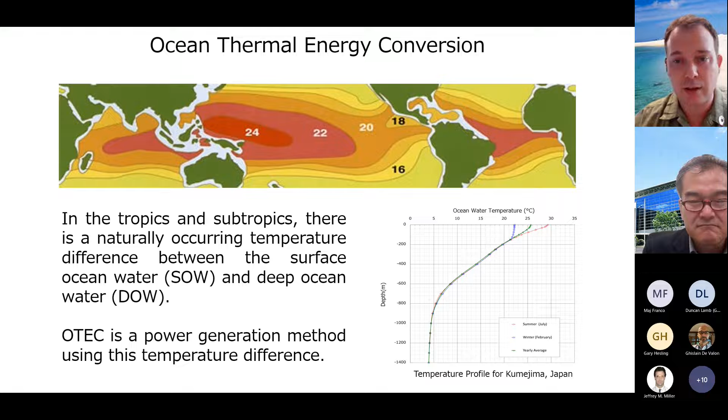The actual process for harnessing this is relatively simple. It's as simple as a steam engine, where instead of using water as our working fluid, we use a low boiling point working fluid. We put that working fluid into a heat exchanger where it is warmed by the surface seawater. The surface seawater is naturally heated by the sun, so the ocean acts as a battery where it heats that working fluid and creates a vapor. The vapor goes through a turbine, turns the turbine, which turns a generator and creates electricity.

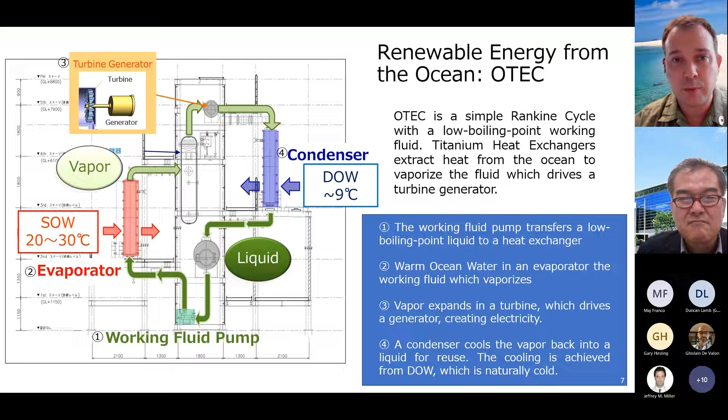And then we also get more efficiency, more help from the deep cold water as well, because that cold water turns that vapor back into a liquid and provides more motive force so that liquid can be reused again in a closed continuous cycle. And that's a really key benefit of OTEC: a closed continuous cycle means we can produce power 24/7, but renewably as well.

So here on Kumejima in Okinawa Prefecture, the Okinawa Prefecture government in 2013 established a demonstration facility to use existing deep sea water intake pipelines to demonstrate this technology long term. And so this is a 100 kilowatt facility, which is equivalent to about 250 households of power generation.

In Japan, our roadmap for development starts with this current demonstration facility, but our future goal is for an offshore large-scale facility with low-cost power generation at the 100 megawatt scale. To get there, we see two kind of branching markets and two branching opportunities. They both start at the next step of development, which is a 1 megawatt scale, which Kumejima Town here on Okinawa, on this island, is currently working towards.

This opportunity allows for not just power generation, but uses the water resources in a variety of ways that are interesting for island development and for island security. And so this is the next step that we're currently working on right now on Kumejima.

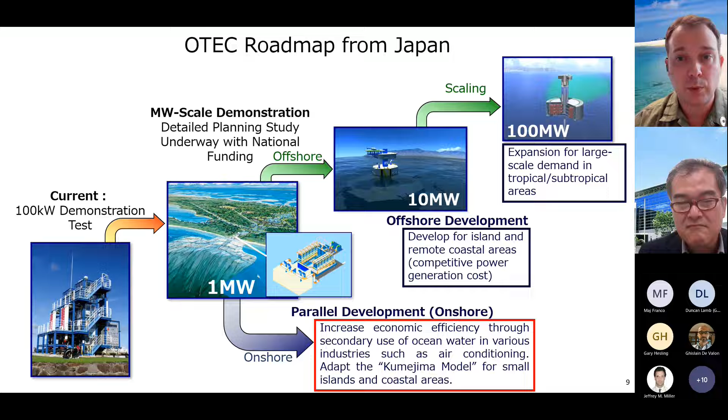Potential for this technology is worldwide. We need a temperature difference of generally what's considered about 20 degrees Celsius. So this is a vast area of the world where traditionally underserved communities can have the largest access to potential for this. So of course, Okinawa and where we are here in Kumejima is right at the edge of that usable belt, but there's a vast area where places like Indonesia, the Philippines, Oceania have really good access to this resource.

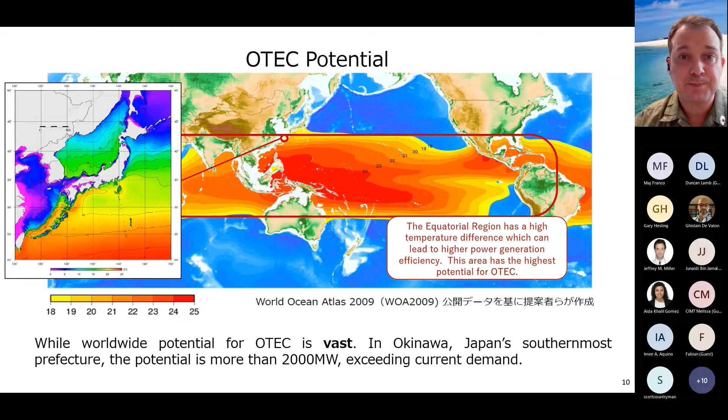And so this onshore OTEC combined with different industries creates a local resource that can help us address these global challenges we're seeing ever more strongly and needs increasing ever more dramatically from a single system. So the OTEC resource allows us to address energy security, water security, food and economic security, environmental security challenges, while also saving energy through things like seawater air conditioning. And so it's access to a resource rather than depleting the resources we have currently available.

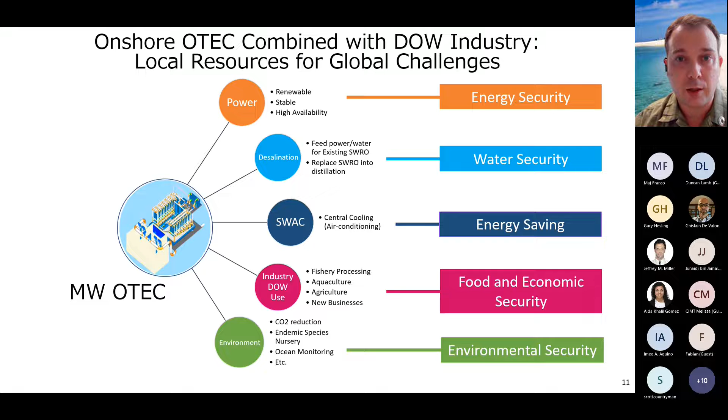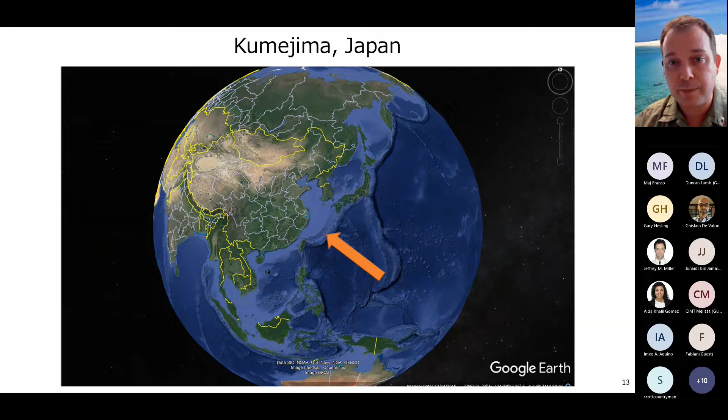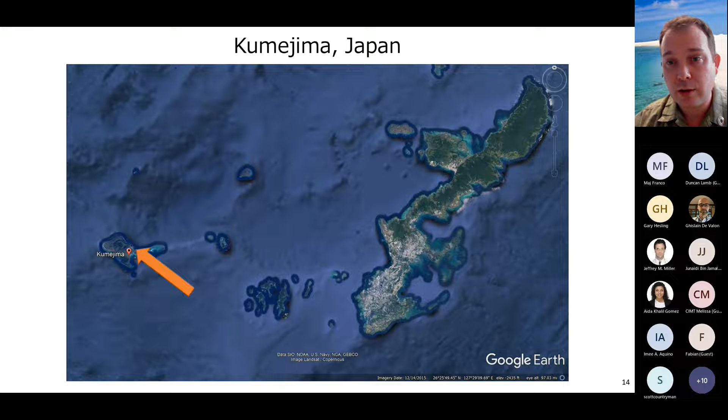So I'll talk a little bit more about what we're doing right now and how that will apply to this image of island security that we are looking at. So Kumejima is located in the Okinawa Prefecture, which is the southern part of Japan. Okinawa Prefecture is a community of many islands. And like many of the island nations that are looking at this technology, we're 100 kilometers west of the Okinawa mainland, out on our own on this small island grid.

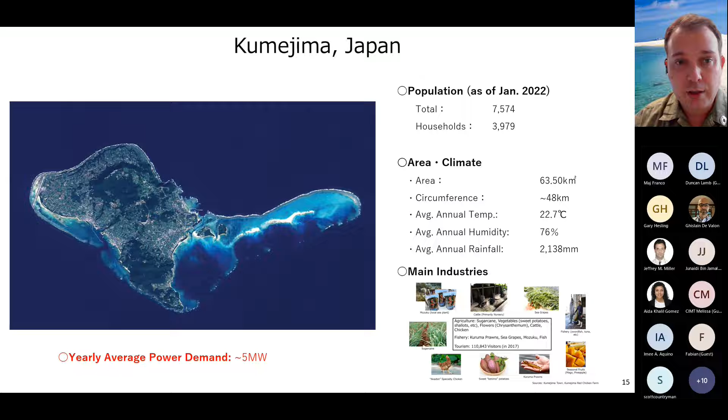So we have a population of about 8,000 people and an average power generation demand of about 5 megawatts. Our main industries are fishery and some agriculture, but we don't have a lot of tourism because there's other places that are more active. So the largest industry actually for Kumejima has become deep ocean water industries. Because we have access to this great deep water resource, we're able to produce our own products and actually export them as well throughout Japan. We've become the leader in several fishery products, as well as having growing demand for more production on this island as well.

So to talk a little bit more about what this resource is, what is deep sea water? Surface seawater is warmed by the sun. It's the natural seawater you see all around you, and it's a large part of the world's ocean and the world's surface. So it's a vast resource. But the rest of that water, the water you can't see, the deep sea water, is the larger resource. More than 90% of the ocean is deep sea water. We consider anything more than 200 meters to be deep sea water. So that's cold, it's nutrient rich, it's clean. It's a great resource for a variety of industries that I'll talk about in a little bit.

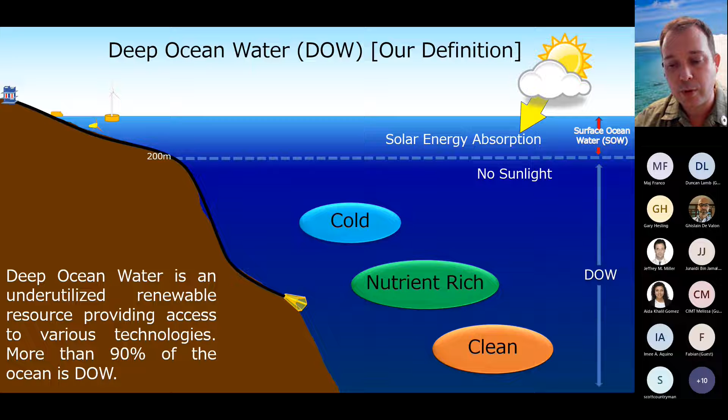It's probably hard to see because it's small, but when you talk about ocean energy, you talk about offshore floating wind and tidal and waves, and you can notice that the resources that they work from, while vast, are just a small part of the total resource we have out there. So really, deep sea water provides a great opportunity for a lot of people, and it's been underutilized so far.

In Japan, though, we have 15 sites that are currently using deep sea water throughout Japan, from all the way up in Hokkaido, where it's very cold, down to here in Kumejima. The uses of the water depend on the various properties of deep sea water that the industries are looking for.

Some of it's industry, some of it's academia, and some of it's just research. But they go from everything from food to bathing to aquaculture to even mineral extraction and refrigeration. So there's many different ways we can use this deep sea water depending on the needs

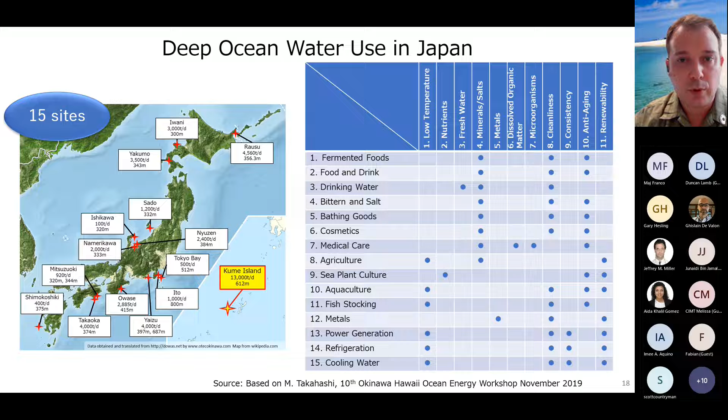of the local community. On Kumejima, while we're isolated and far away, production has grown organically from the efforts of local people. So we currently have about $24 million a year in annual revenue from various industries that have grown up here, mostly from fishery, and also a growing area from cosmetics. Even through the pandemic, we've heard that the cosmetics and other industries have continued to grow. So we're now closer to about $30 million a year in revenue, which is equivalent to about 300 jobs, which is really huge for a small island community like this.

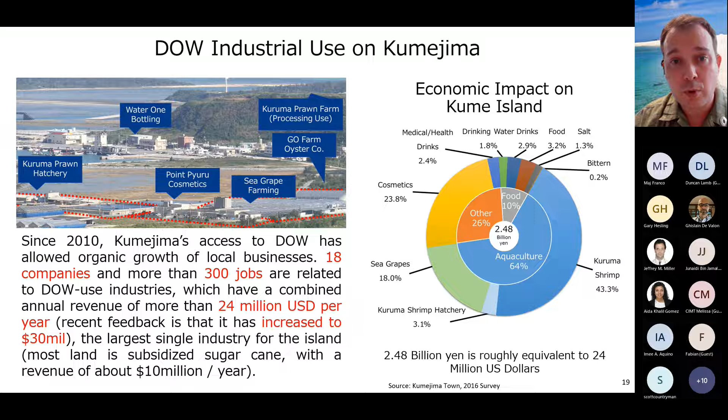So it's become actually the largest single industry for our island. Most of our land use is still for sugarcane. That only has a revenue of about $10 million a year. So we're far past the revenue from agriculture, just from a small scale footprint. So it's great for these island communities.

As far as aquaculture goes, Kumejima has long had the highest market share in Japan for kuruma prawns, which are a type of shrimp, and sea grapes, which is a type of sea plant. And both of these are produced with deep sea water or deep sea water properties.

Well, lately we have other industries that are coming online as well, with companies trying to increase the sustainability of their products, such as safe to eat raw oysters or different kinds of sea plants or even salmon. And so the deep sea water provides different benefits, such as bacteria-free water or temperature control that allow them to produce sustainably and safely, but also profitably, even on a small scale.

Cosmetics can be produced from deep sea water. The clean resource allows for sustainable water production. The minerals also can be included with other local ingredients and create a great product that can be used both locally and then also for export. So currently our local production company does OEM, providing production capacity for other companies throughout Japan and also abroad as well.

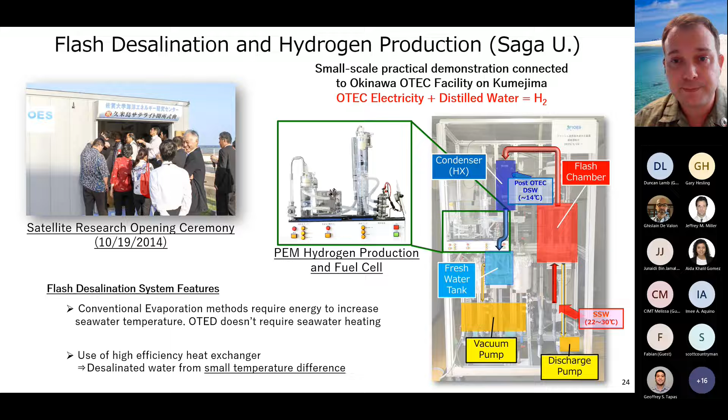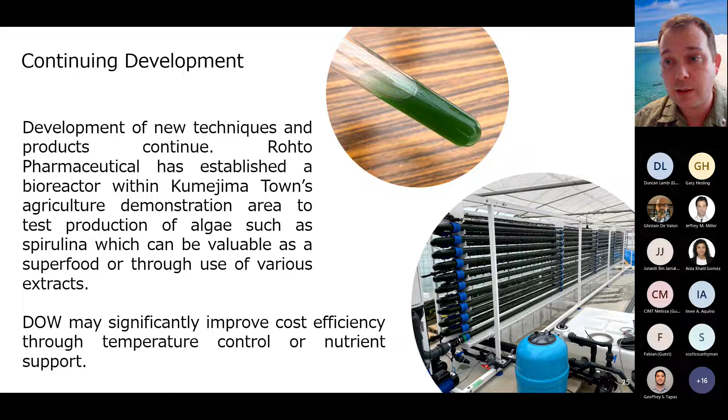Development continues with new companies coming in to use this deep sea water resource in new ways. One of them is Rohto Pharmaceuticals, which is a famous healthcare provider in Japan. But they're also looking at ways of helping social health and sustainability. So they are using the deep sea water resource to grow different kinds of phytoplankton, both for primary production, but all the way through tertiary production through additional industries such as craft beer production, also sales through their local cafe, so that they can model the different benefits of using both deep sea water with energy in a variety of

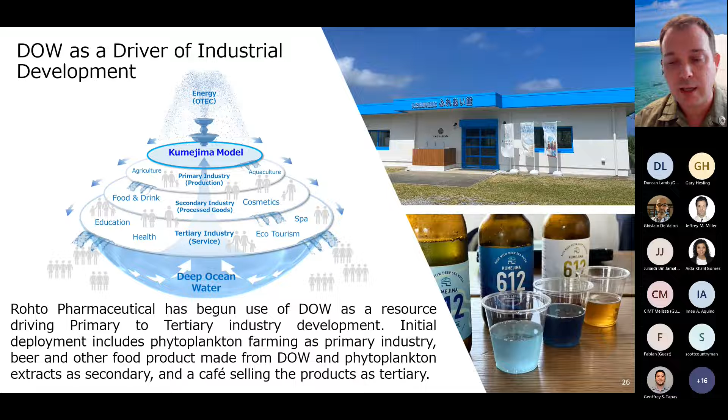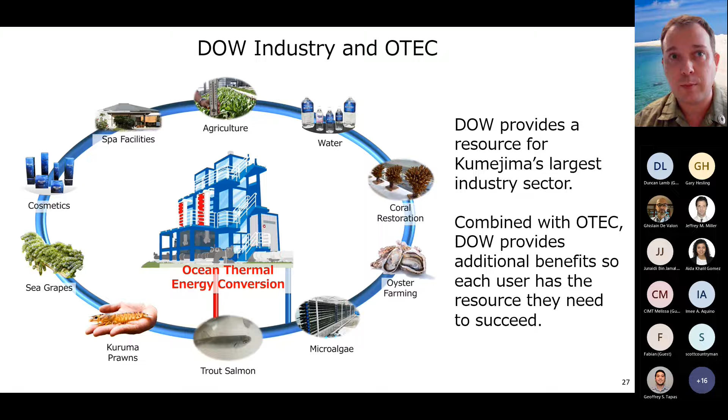ways for island communities. And so for our view on Kumejima, we don't think of OTEC just as a single power production or single industry, but we combine OTEC with all these different potentials to create a kind of systematic approach to future energy.

Around the world, OTEC and deep sea water has been catching on. So within the deep sea water use, there's many different ways that we can use it, from seawater air conditioning to provide high efficiency, low environmental impact cooling, OTEC for power production, and low temperature thermal desalination for freshwater production. Throughout the world, there's now 38 sites with more than 45 pipes using this resource in a growing way. And this started in a big way in the 1980s in Hawaii.

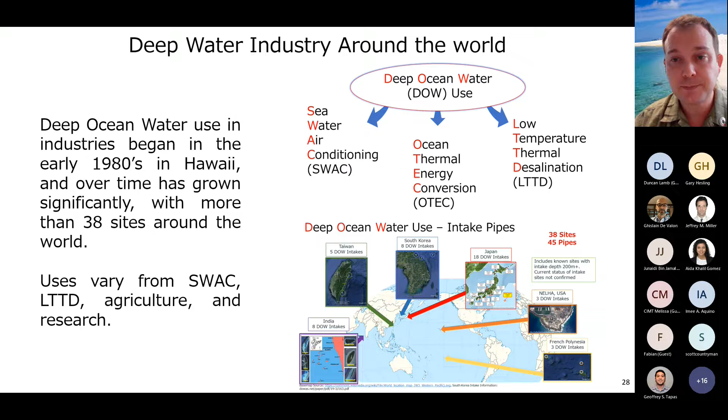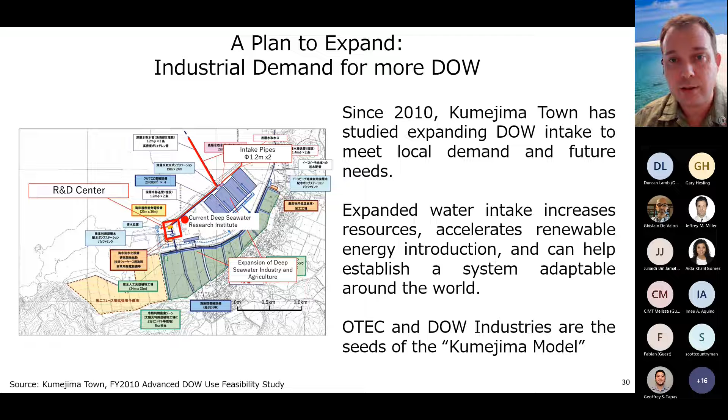So now I'll talk about how we're integrating these different industries and OTEC for the near-term future for Kumejima. Because on Kumejima we have all these great uses of deep sea water, there's been more demand to increase the intake capacity and increase the amount of water so we can expand these industries. At the same time, these provide the seed of what we call the Kumejima model, which is combining OTEC and various industries in a more efficient and smart way.

So instead of using water just once in various industries, we want to cascade the water. We want to use the water multiple times so that we're not wasting this great resource. We can use it in power production, but once the water leaves the power plant, unlike other fossil fuels, it doesn't become a pollutant, it doesn't become a waste, it becomes a resource for us. As deep sea water goes to the facility, it's slightly warmed, and that warm water can be reused in things like agriculture or even in fisheries multiple times.

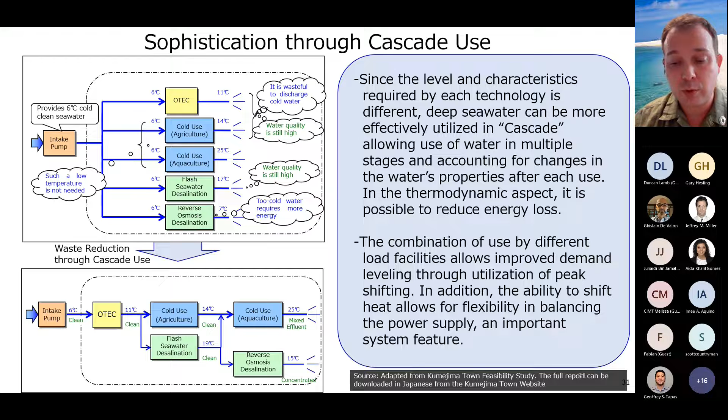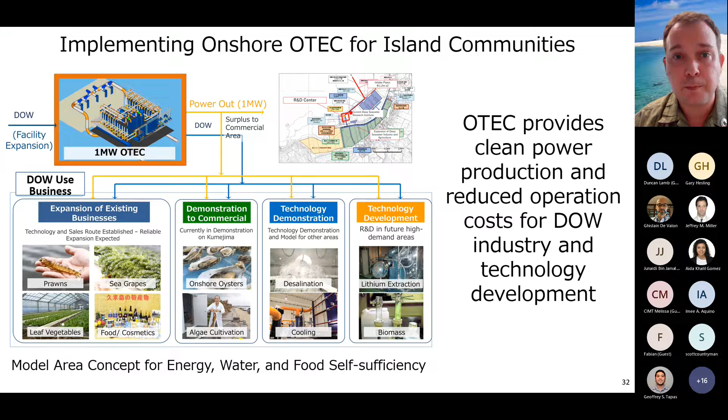So for implementing this here in Kumejima, and hopefully around the world, we expect to have at least a 1 megawatt OTEC facility powering this local community that also enables expansion of current businesses, technology demonstration, and the opportunities for new ideas to come in and expand. And that's where I think MARES is also really starting to think about how we use the ocean in new ways. This also feeds into Kumejima Town, the local government's look at the future, where in 2008 the mayor announced that they would work towards 100% clean energy.

To do that, they did an energy vision, looking at how the town could take advantage of the different technologies out there to get to 100% renewable energy. And how long will that take? For the town of Kumejima, we have an average of about 5 megawatt load. Our future looks to offset the current diesel power generation at a small scale with 1 megawatt OTEC as the next step. That will allow us to reduce the amount of diesel power used locally and also increase the amount of renewable energy we have on the grid without negatively affecting the grid.

In the future, with an offshore facility, a total of about 6 megawatts of OTEC generation, we're able to go 100% renewable energy with OTEC, solar, storage and demand response technologies to manage the grid. So this is the view for Kumejima. To implement this, we look at how we put in this deep sea water and generation facility. For us, we see deep sea water as a separate business and intake that allows us to provide a resource for a variety of industries.

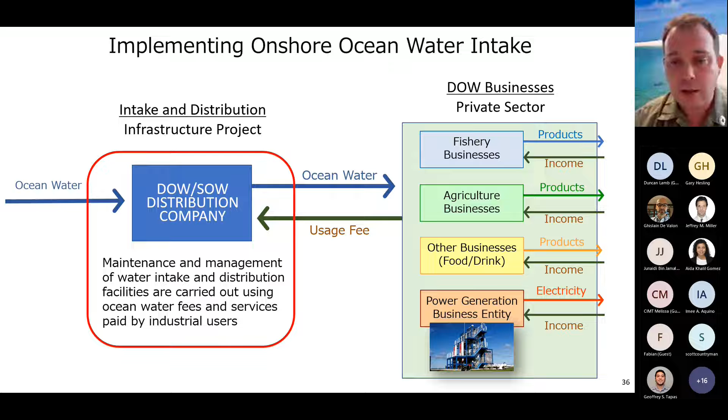These different industries can act as private sector businesses where they buy water from the distribution company and then provide revenues back. It creates a system where there is infrastructure available for the various uses, but also allows OTEC power generation to become a much simpler process. It's just a power generation company, just like any other IPP. So it becomes a very simple equation in terms of energy.

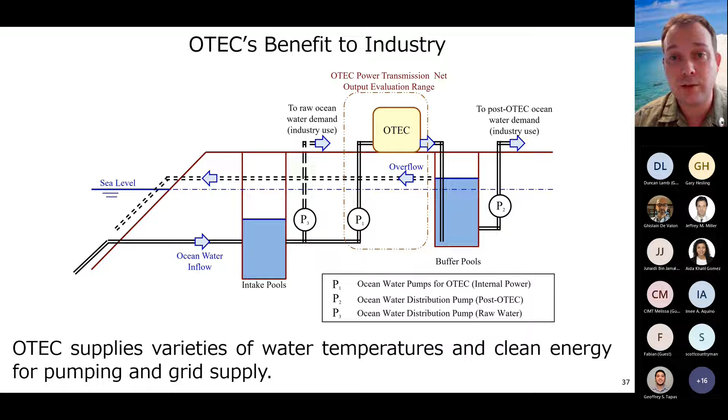But it also provides benefits. One of the benefits of OTEC is that as it supplies different temperatures, it can make it easier for the different deep sea water and surface sea water industries to get the water and the water quality they need to produce their products, and also reduce the pumping costs and other issues they would have if they tried to just put a pipe in the water on their own.

So how much does this cost? We look at two different scales, two different markets for OTEC: onshore and offshore. Onshore is considered anything up to about 5 to 10 megawatts. For 10 megawatts or larger, because of the large scale of the pipes required, we expect that it needs to be offshore. Offshore is more difficult, but at larger scales the economies of scale help bring down the cost significantly. In the future, we expect a 100 megawatt power generation facility to have a power generation cost of about 10 to 11 cents per kilowatt hour. So then how do we address the short-term small-scale costs?

So if we consider OTEC alone with the deep sea water altogether, of course it's very expensive. It would cost from about 40 to 60 yen or cents per kilowatt hour, which is expensive. However, if we approach this as we are doing in Kumejima, where deep sea water is an infrastructure project, a separate project, then we can reduce the capital cost in considering OTEC by reusing that water in multiple ways through different industries. And that brings the cost down really dramatically.

If we're just talking about OTEC, then we're at the 10 to 15 cents per kilowatt hour level, which is competitive with the diesel we have on the island already. So that's a really attractive approach and something new that hasn't been looked at in the past when we're talking about OTEC.

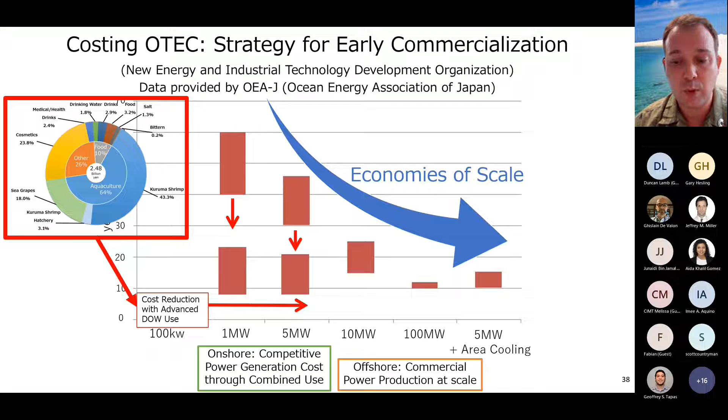So just to give you a general breakdown based on research done in Japan several years ago, the New Energy and Industrial Technology Development Organization of Japan, NEDO, did a study based on OTEC. Adjusting to current US dollars at 125 yen, we had a capital cost of about $24 million for an OTEC facility. If we include some of the capital cost for a pipe in that, we get a power generation cost of about 24 cents per kilowatt hour.

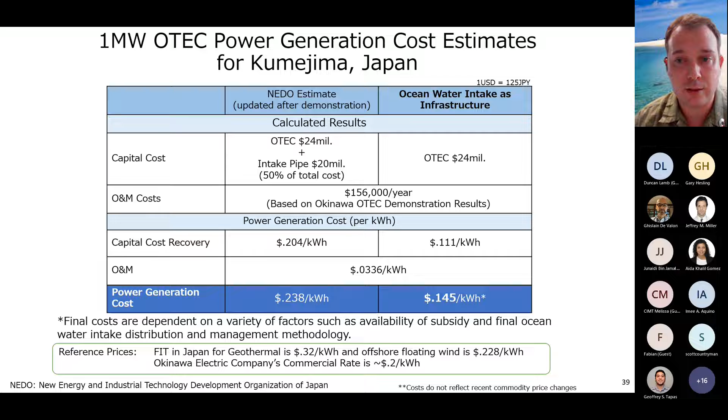If we separate those, if we make OTEC just on its own a power generation project, we come down to about 15 cents per kilowatt hour, which again is attractive. And with the current subsidies that are available, either with feed-in tariff or the different kinds of rates that are available, it can be attractive even at this very small demonstration initial stage scale.

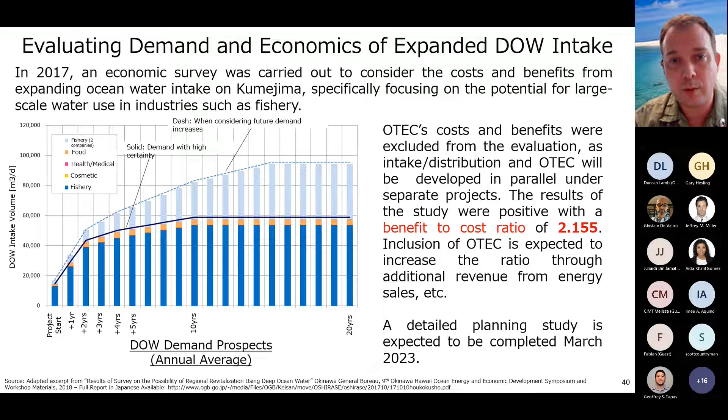And so for Kumejima, what are the benefits and costs for this? In 2017, we did an economic survey looking at how much water can actually be used on the island, including with OTEC. It found that from a project perspective, it had a benefit to cost ratio of 2.155. That's a really great figure for us. It shows that there's a lot of benefit for the public from this kind of infrastructure project.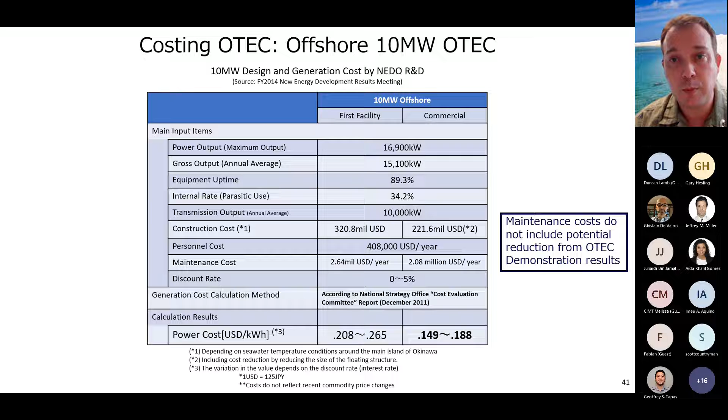And then in the future, as we go offshore, looking at the larger scale, this estimate doesn't include any improvement in maintenance costs that we found from our demonstration here on Okinawa, but we still have competitive power generation costs, where potentially for this offshore 10 megawatt for the larger communities that need more power, 15 cents to 18 cents may be viable for even the early stage OTEC demonstration facilities.

So now I'd like to talk about OTEC technology readiness and some of the challenges and opportunities that we have right now. A lot of the questions we get is, is OTEC viable? So what about the deep ocean water intake? Onshore OTEC does require a large intake pipe, and it also requires very long intake pipes. That's where the major cost issues come from for onshore applications.

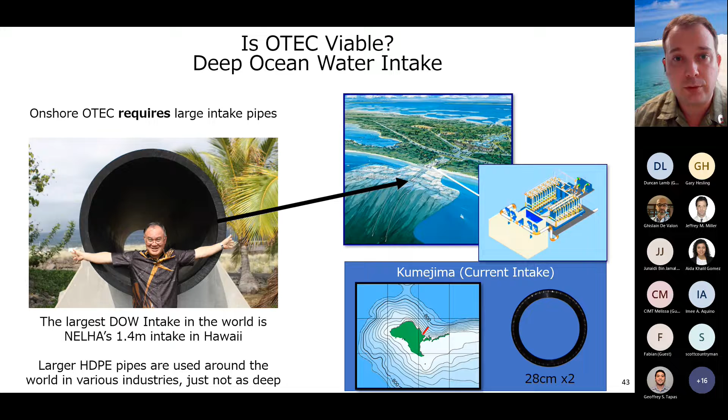At NELHA in Hawaii, they have a 1.4 meter intake already established. So it's an established technology. It's there. Kumejima, however, for our current small scale intake for this 100 kilowatt demonstration, we only have 28 centimeter pipes. So how do we then expand? Is it viable to do that? Well, there are pipes throughout the world now. Just 20, 30 years ago, there were only a few locations that used these.

Now, pipes, even in the deep sea water, are situated throughout the world, used for cooling hospitals in Tahiti, used for different kinds of cooling for resorts or fishery intakes and all kinds of applications. So it's an established technology. They're long-term, low maintenance, and it's a great resource.

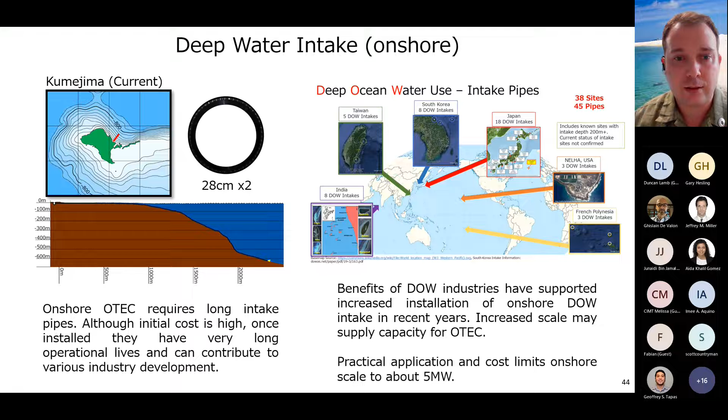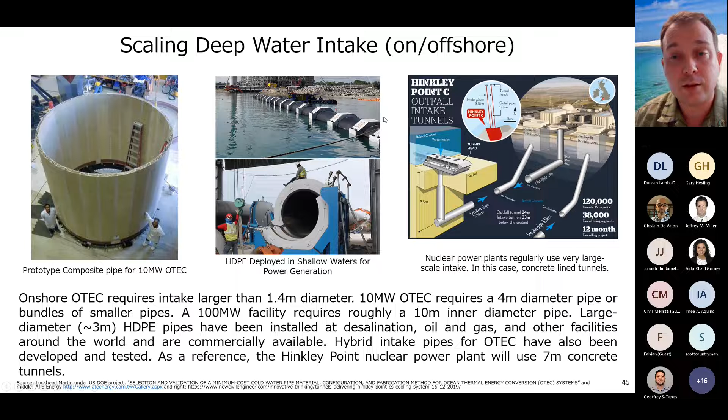When we go offshore for large-scale pipes, HDPE, the high-density polyethylene pipes, are now used for power production facilities around the world, and there's large-scale production and experienced companies that install them. There's also been work done looking at larger-scale facilities when they go offshore. And even for nuclear power now, they use very large intakes. Hinkley Point, which is under construction, just recently installed very large-scale concrete pipes. So there's a lot of other industries using these technologies that feed into OTEC and help offset a lot of the concerns that there used to be for OTEC.

How about the power generation system? Is OTEC viable? Well, since 2003 at Saga University, which Professor Ikegami is the director of, they've had a small-scale lab using the technology and testing various cycles, various working fluids and different components. Then this research was put into actual use here on Kumejima in 2013. From that, we've had long-term autonomous automatic operation in a real-world environment, and we have that data that helps us look at the future.

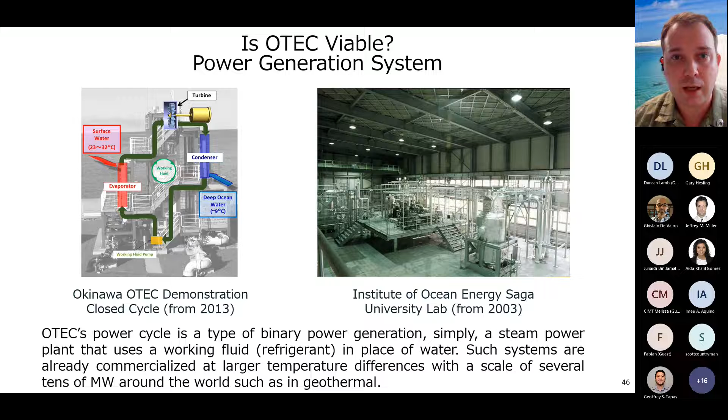In the 1970s and 80s, there was initial work done in OTEC, both in Japan and Hawaii. And the evaluation was that OTEC is technically feasible, but not economical.

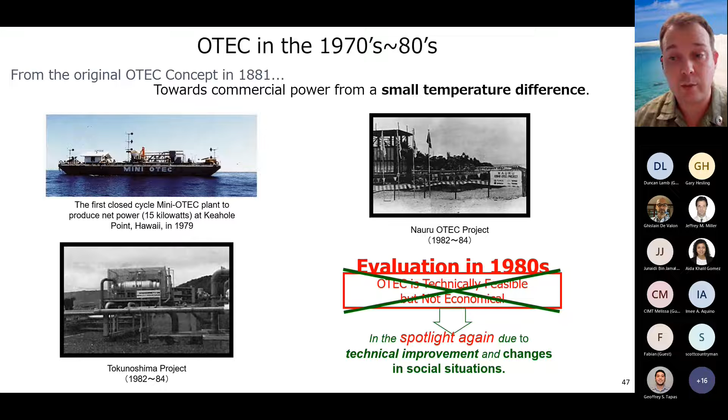That has changed. So it's in the spotlight again because there are technical improvements. There has been research that we've done that has improved that equation. A lot of that comes from a lot of the industries that are working in the ocean. Just 10, 20 years ago, the deep sea ocean wasn't a very established market. However, now there are many facilities, many platforms, many technologies that are easily able to work in very deep waters. And deep water means that we have access to deep sea water.

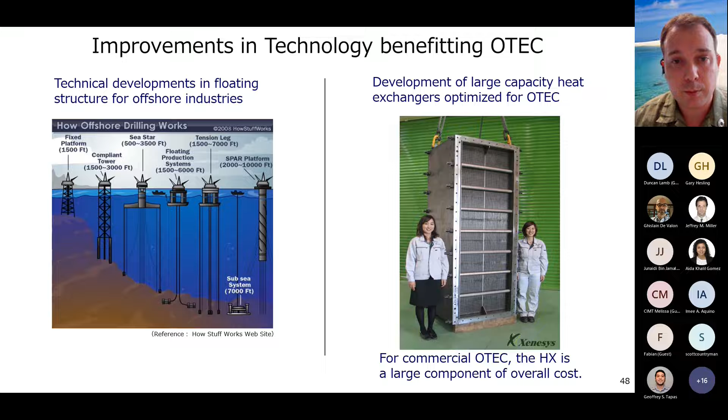We've also done a lot of development on increasing the large-scale capacity of heat exchangers and optimizing them for OTEC to reduce the costs for OTEC as well. And so for commercial OTEC, the future major cost will be in these heat exchangers. So if you can reduce the cost of those by increasing performance, it has a big overall effect.

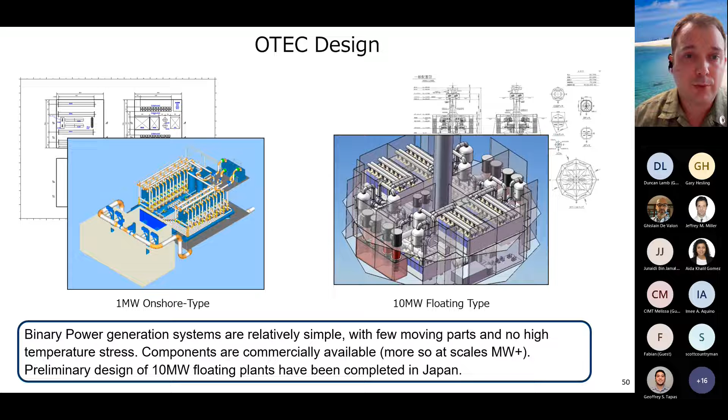So using our demonstration facility here on Kumejima, we've looked at the OTEC demonstration and allowed that to directly connect it to our future 1 megawatt, 10 megawatt implementations in order to accurately design and plan for those large-scale future implementations. So we already have, based on the current demonstration, designs for 1 and 10 megawatt facilities that can be quickly applied to other communities through adjusting to the local conditions.

The heat exchangers that we developed and are testing here at the demonstration are directly applicable to the 1 and 10 megawatt scales by adding more plates, increasing the number of units. And so the data we have now is directly applicable to large-scale facilities. We also use titanium, and they're fully welded. So that means that we don't have any risk of mixing our working fluid with the seawater, so we can reuse it again in different industries.

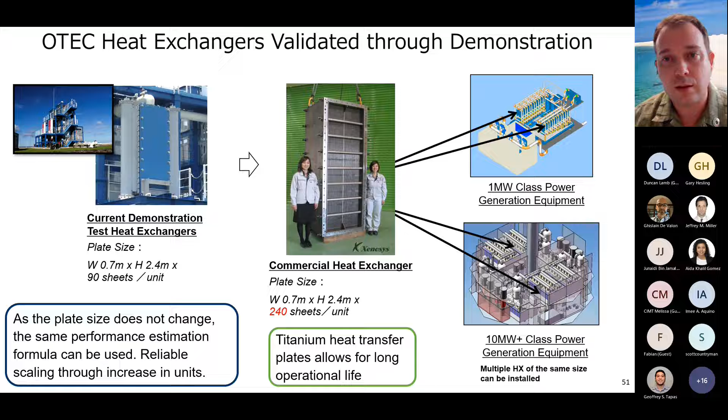Titanium also has a very long shelf life, long operational life, which means that we can reliably use these technologies for 20, 30, 40 years, just like a traditional power plant. So while there is a large capital cost, the payback can be quite advantageous.

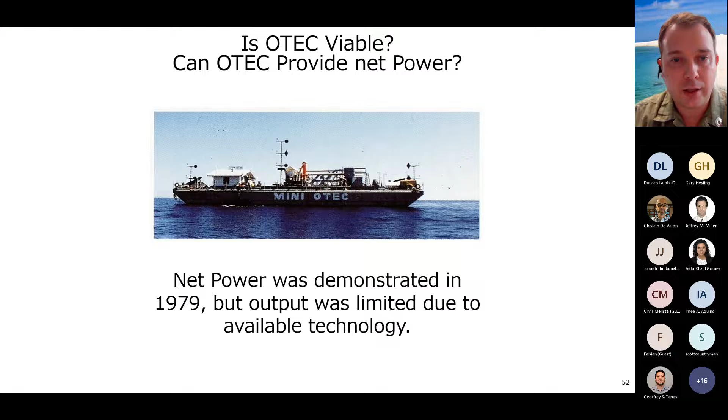So is OTEC viable? Can OTEC provide net power? Net power was demonstrated in 1979, but it was, of course, limited to the available technology at that time. One of the major improvements is that in the 1970s, 1980s, 70% of the power produced was used internally. That meant only 30% of the power would then be available for the grid. Today, with the current technology, we can produce about 70% of the power for the grid and use the remaining 30% for the internal piping and operations.

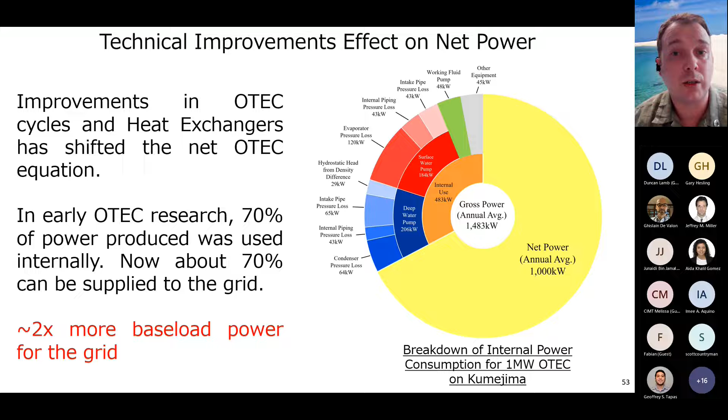That means it's almost 2 times more baseload power for the grid, which means that power is available 24/7. So that's the biggest difference between the original OTEC studies back 30, 40 years ago and what's going on today. There's more power available.

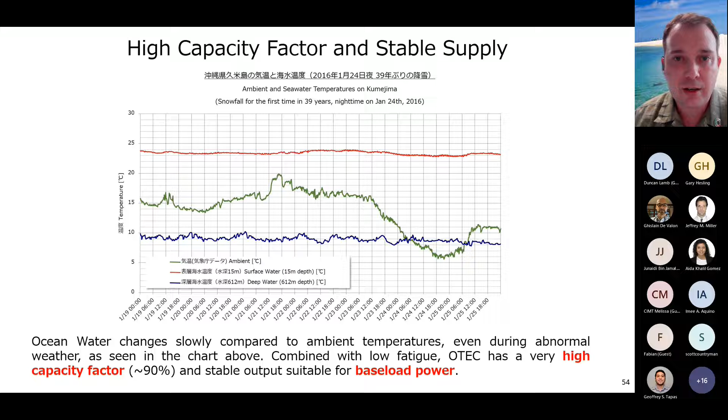How about OTEC in the environment? So compared to traditional fossil fuel facilities, of course, there's a capital cost, there's a carbon cost for the facility itself, but there's almost no maintenance, there's no fuel cost. So in Japan, we've done some research such as evaluation of OTEC and DOW industrial use, looking at how does that OTEC facility affect the fisheries? Does it improve? And so with large-scale OTEC, we have a massive impact on reducing the ecological footprint from these kinds of power production and fishery perspectives.

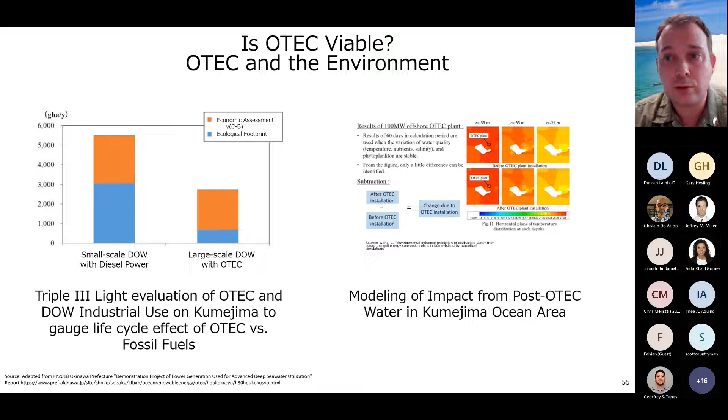We've done modeling to look at plumes because deep sea water is nutrient rich. And so if we put that nutrient-rich water back in the ocean, we need to do it responsibly, but it's also putting ocean water back into the ocean. So it can be done in a way that doesn't affect the local environment, but we've also done studies to make sure that that's true.

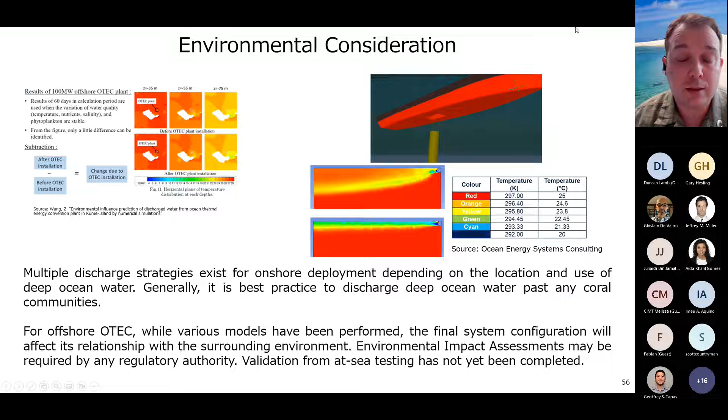And there have also been large-scale plume studies around the world looking at how, when we discharge water, we make sure that we don't affect the coral environment. Because nutrients may affect corals, we want to make sure that the water is discharged past them. But there's also maybe a need for more environmental impact assessments for local communities as well, for small-scale implementation.

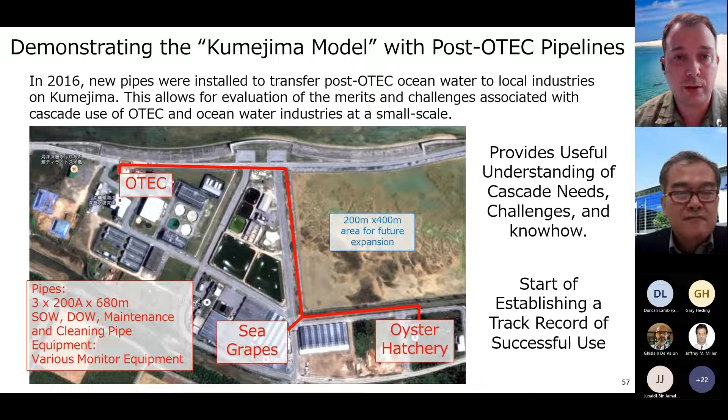We've done some demonstration already with not just OTEC, but also using OTEC water in industries. Currently, at our demonstration facility, we believe it's the first time in the world that someone's been able to do this, where we produce power, we put water through our OTEC facility, but we also connect that water to both our sea grapes and oyster production as well. And so those are currently two ways of using the demonstration to inform future operations and opportunities.

I'll pass over to Professor Ikegami now.

Power generation cost: OTEC and onshore wind are very beneficial. Small OTEC is very high cost, but at least 1 megawatt OTEC has some benefit. Over 10 megawatts, it is very close to or below solar power. For initial cost, solar and onshore wind have a large benefit. For OTEC, the intake tube is very costly, but the power plant is almost the same. But if the intake tube is supplied by public infrastructure implementation, we can cover this intake tube cost. Running cost is this result, solar and onshore wind.

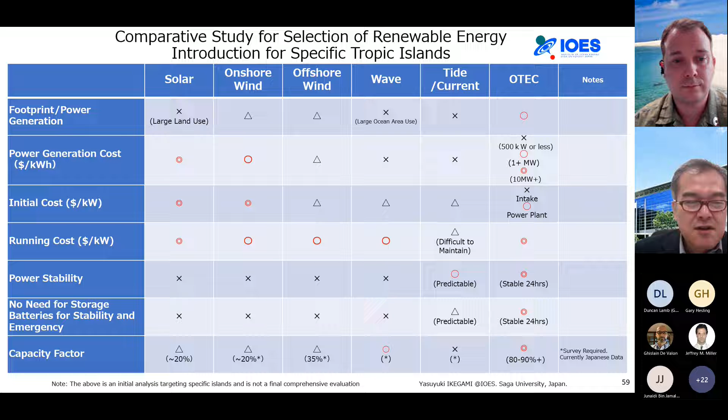For OTEC, the running cost has no need for fossil oil. And power stability: OTEC is constant, 24 hours stable, and no need for storage. OTEC needs no storage, but other energies very much need electric storage. Capacity factor: solar and onshore wind are below 20%, but OTEC is over 80 and 90%. Next.

Necessary internal power: OTEC needs 20 to 40% internal power. And employment creation, OTEC is combined use. And industry benefit, only OTEC has a benefit because not only electricity, but spin-offs and byproducts are possible. And for hydrogen, OTEC has a high benefit because OTEC produces both water and electricity, so we can generate hydrogen very cheaply. Next.

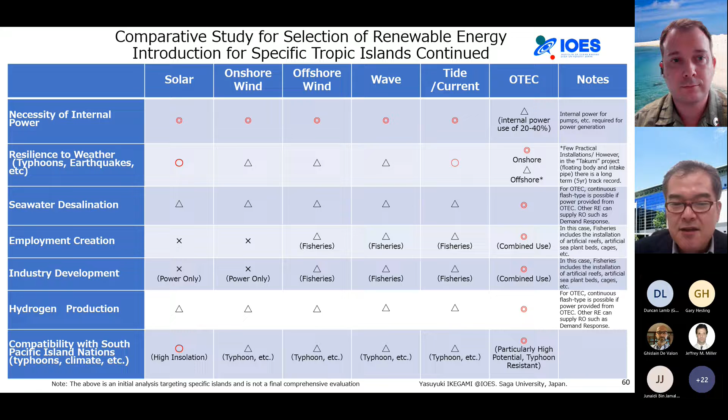So in total, we have proposed OTEC and solar combined, a 100% renewable energy strategic combination of OTEC and solar power generation for effective SDGs achievement in the tropics. Next, Ben-san, please.

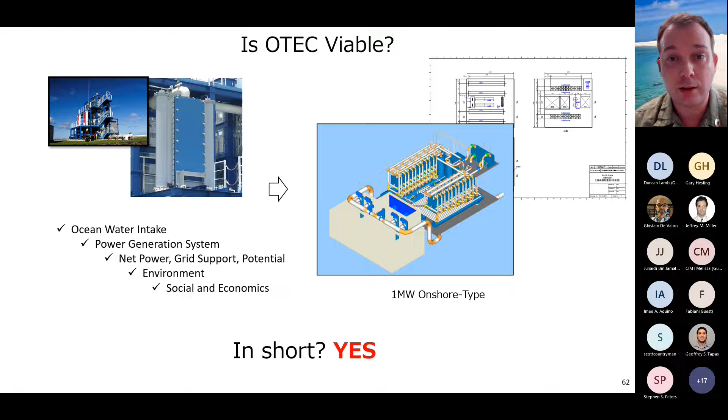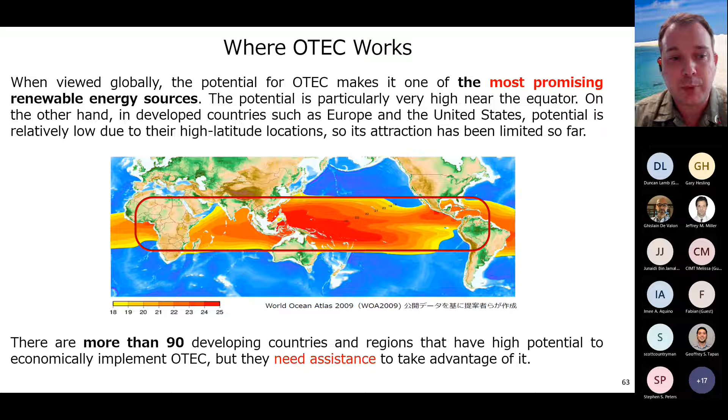So is OTEC viable? In short, yes, we believe so, because it hits all of the necessities for island communities, and we've shown full implementation at the small scale, but also that it can work at the large scale as well. So where can we do this? Viewed globally, the potential for OTEC makes it one of the most promising renewable energy sources for this huge area of the world, especially near the equator. On the other hand, it's not so easily accessible for places like the United States, Canada, and a lot of Europe, and so the interest has been relatively limited so far. However, there are more than 90 developing countries and regions that have high potential, but they also need assistance to make it happen for them.

So how do we see this happening for implementation for MARES? OTEC is aligned to the MARES goals. For Kumejima, what we're doing right now is a 1 megawatt scale. We have a projected start in 2024, looking towards installing a new pipeline to expand our water capacity in order to enable a 1 megawatt facility.

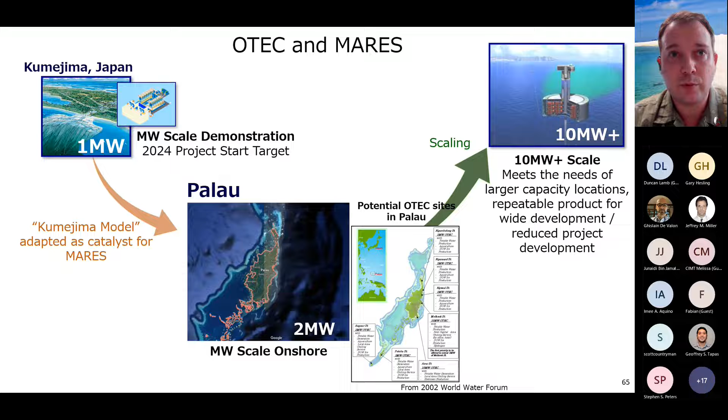This Kumejima model can be a real catalyst for MARES, such as an intake installation in a place like Palau, where a 2 megawatt OTEC facility would enable them to look at not just power generation, but all of the MARES framework. Essentially, OTEC would be the resource provider for a lot of the MARES framework ideas that have come out. And that can be scaled again to the 10 megawatt plus scale offshore for larger communities and larger islands that need water. And that electricity can be connected by cables or other technologies that are being developed, very easily, with the offshore wind communities as well.

There's also a lot of OTEC and power-to-X opportunities. A lot of island nations don't have access to clean water. There's a lot of concern about future hydrogen and ammonia production. They don't have access to rare earths, rare metals. However, a lot of that's in the ocean.

And so through OTEC, we can provide a variety of industries. Some of these can only happen onshore. Some of them can happen offshore as well. And so there's a great opportunity to look at how each community creates its new economy from the ocean, from the deep sea water resource.

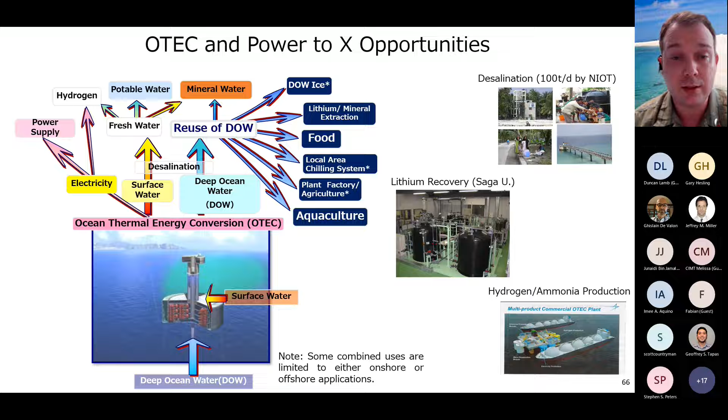So if we can create this model, this method of installing a resource, giving back to communities their local power, then it really changes island communities. And that's why I'm involved in this. I live here on this island, and I hope that this will be the base of my future kids' world. So OTEC, for Palau, if we are going to bring OTEC, what will it do for them?

We can provide OTEC power generation. We can do deep sea water air conditioning. We can use desalination for water production, and water can be used in multiple ways for industry development. It requires a system approach, looking at the infrastructure to enable energy, water, and food, but it also creates baseload power that can help reduce the overall carbon load on the community by enabling more renewables to come in without offsetting the resilience of the grid.

It can address small community needs. It can increase large-scale commercial deployment and also reduce risks. Professor? Finally, together, MARES and OTEC provide a new model for island development, providing island and coastal communities the local resources they need for energy, water, food, economic, and environmental security. So from the MARES project, including OTEC, we believe that we can achieve the paradigm shift in the world for sustainability and carbon neutrality. Thank you.

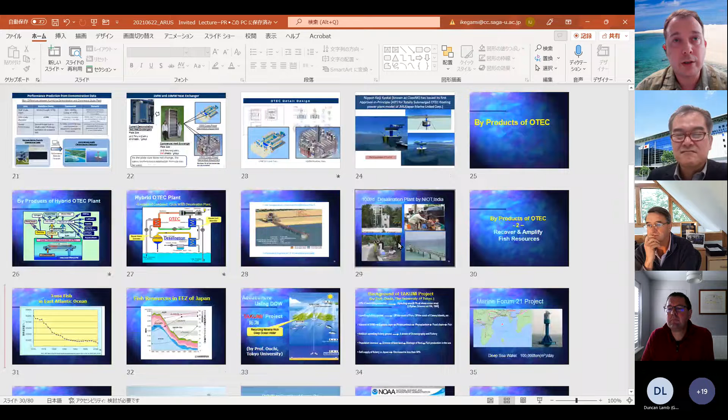Okinawa Prefecture's Deep Sea Water Research Center mixes the water and discharges it at a depth of about 25 meters, about 400 meters offshore, so past the coral environment. There hasn't been rigorous testing, so we don't have that data. However, anecdotal evidence from local people has found no issues. Actually, divers like to go, and they take tours there to dive around the discharge area. And so there's been no negative impacts that we've seen, but there hasn't been a real rigorous study either.

There's generally samples taken from both surface seawater and deep sea water every year just to make sure there's no major issues going on. And then a lot of the studies have been more like modeling. Okay, so if this cold deep sea water is discharged, where will it go in that certain environment? And it's generally found that for large scale capacities, if it's cold deep sea water, it'll sink. And so it'll quickly go to an area where it returns to its natural environment.

In the near shore, of course, if we put that deep sea water into a coral area, there's concern that that nutrient could affect coral. So we want to make sure that when we do discharge, we do it responsibly, but it's something that can be managed and is part of an environmental impact assessment and part of the initial design of the system as well. Okay, great. That's fantastic. Thanks, Ben. That's answered my question.

I think Agostino Miguel is typing a question.